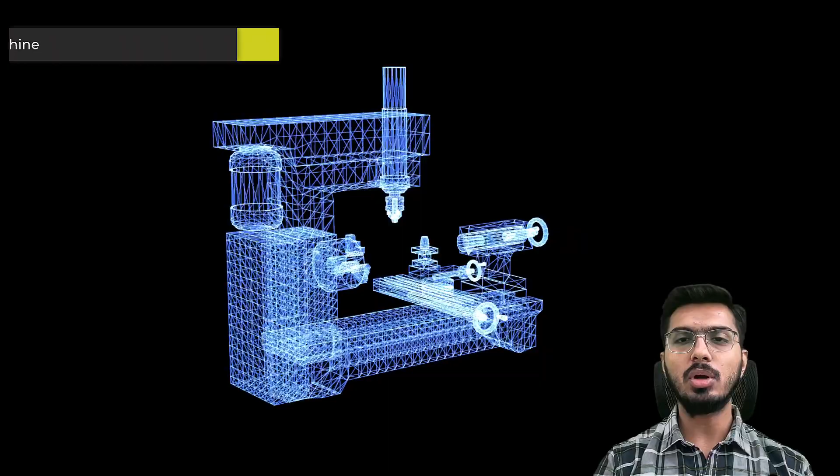In this video, we will dive deep into the intricate details of a lathe machine. We will explore the operation of its various parts.

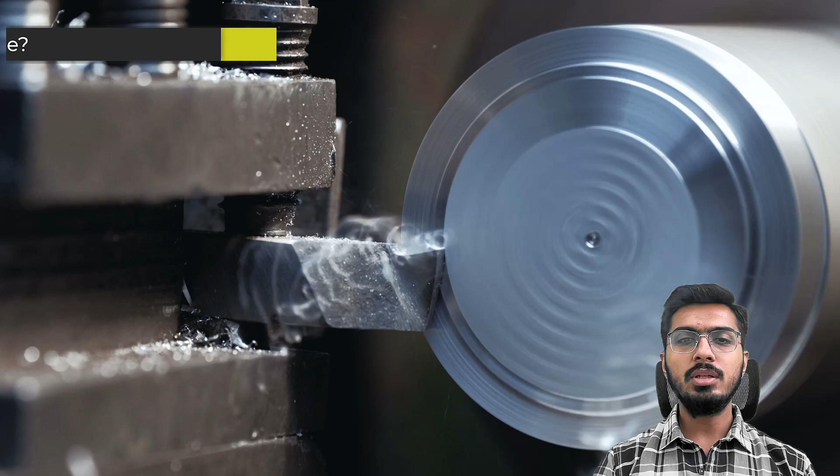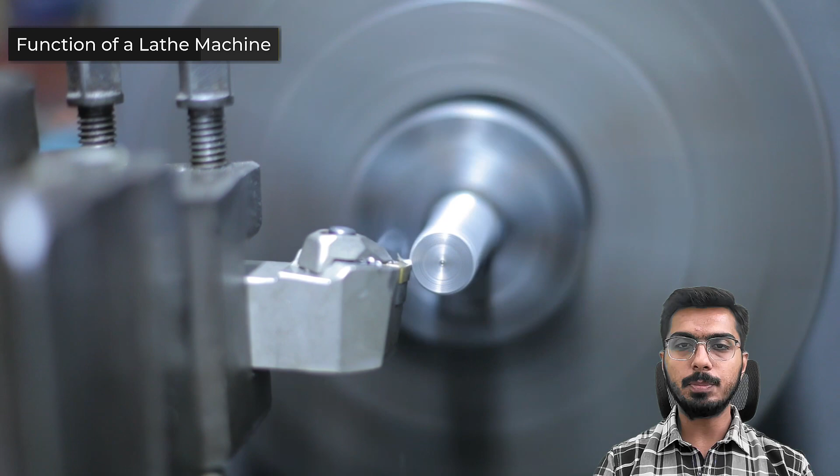Before we dive in, let's first understand what a lathe machine actually is. A lathe machine is a versatile machine tool which is used to shape and size workpieces by removing metal. Its primary function is to remove the metal in the form of chips from a workpiece. This is achieved by securely mounting the workpiece on a machine spindle and rotating it at the desired speed. The cutting tool is then fed against the workpiece longitudinally or crosswise to shape it according to the specifications.

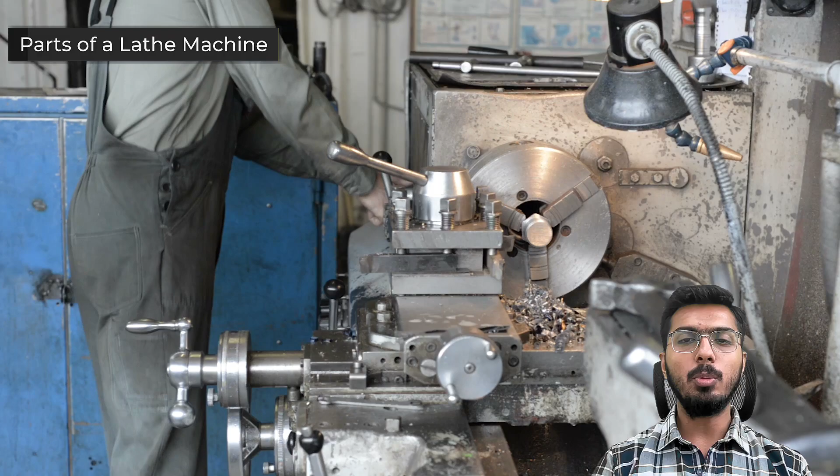Now let's understand the construction details and the operation of different parts that come together to form a lathe machine.

First and foremost, we have the stands or the legs. The legs are usually made up of cast iron. They are made to bear the entire load of the lathe machine. Their high shock absorbance and wear resistance capacity help absorb vibrations during work and transfer them to the ground.

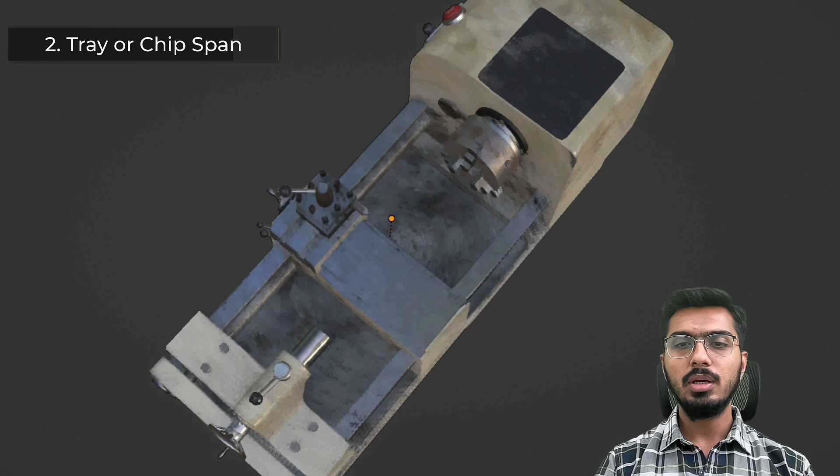Above the legs we have a tray, also known as a chip pan. This is positioned below the bed and above the legs. Its main function is to collect and carry the hot chips generated during the machining process.

Speaking of the bed, it is the foundation on which all the lathe parts are mounted. The bed is a massive and rigid single-piece casting. It is carefully chosen to support the active components of the lathe machine. Depending upon the specifications and requirements, the bed is typically made of semi-steel or chilled cast iron due to their high compressive strength, shock absorbent properties and excellent lubrication qualities.

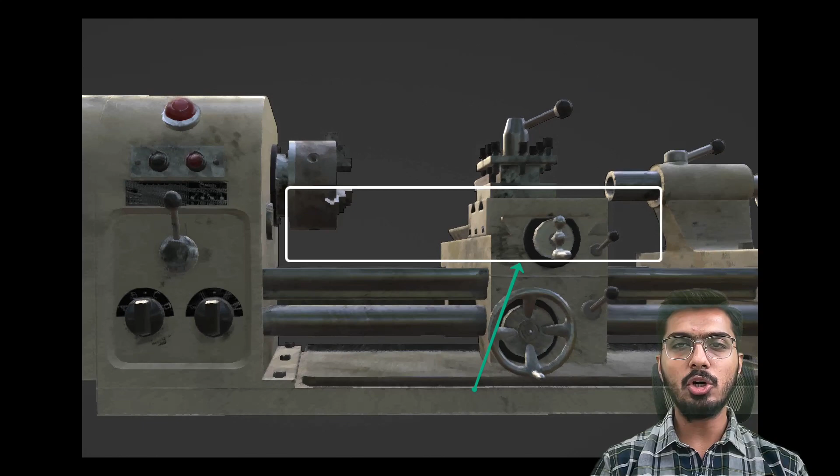In the case of larger lathes, 2 or 3 pieces of bed may be casted and bolted together, while small general purpose lathes usually have a single piece cast bed. The bed features guideways that facilitate the movement of tailstock and carriage. These guideways ensure smooth and precise motion along the bed's length.

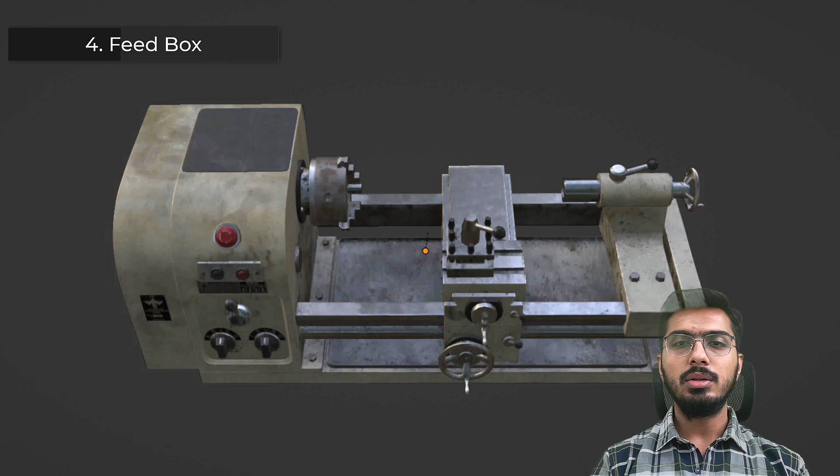Now moving on, we come to the feed box. This is connected to the lead screw and feed rod. The lead screw, an externally threaded shaft or rod, converts the rotational motion into linear motion. This is primarily used for thread cutting operations in the lathe machine. The feed rod, on the other hand, is a cylindrical rod without external threads. It serves to move the carriage from left to right and vice versa.

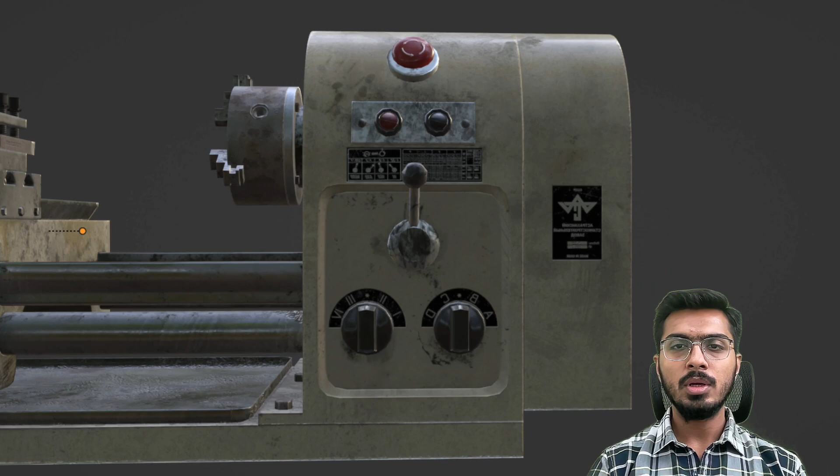Now let's shift our attention to the headstock and tailstock. The headstock is located at the left end of the lathe bed. It houses the driving mechanism, which includes the electrical mechanism of the lathe machine. It transmits power from the spindle to the feed rod, lead screw and the thread cutting mechanism.

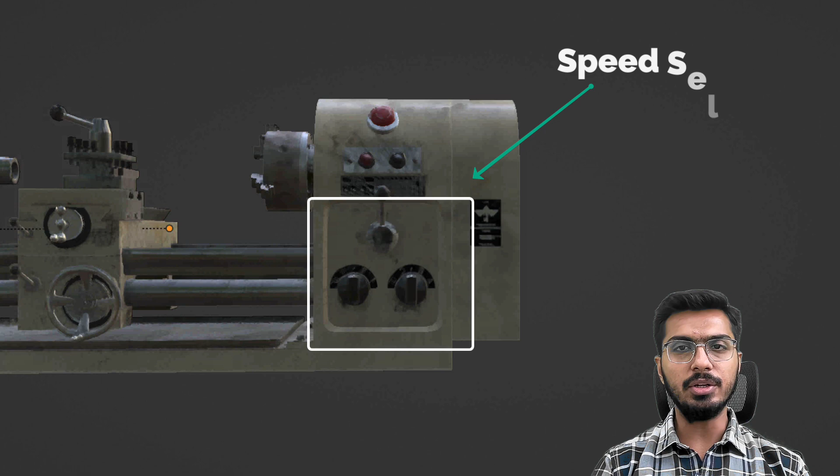The headstock features speed selectors for controlling gear speed, and a driving clutch lever engages or disengages the spindle from the gear mechanism. This driving clutch allows us to control the motion of the lathe, engaging or disengaging the spindle with the gears as needed.

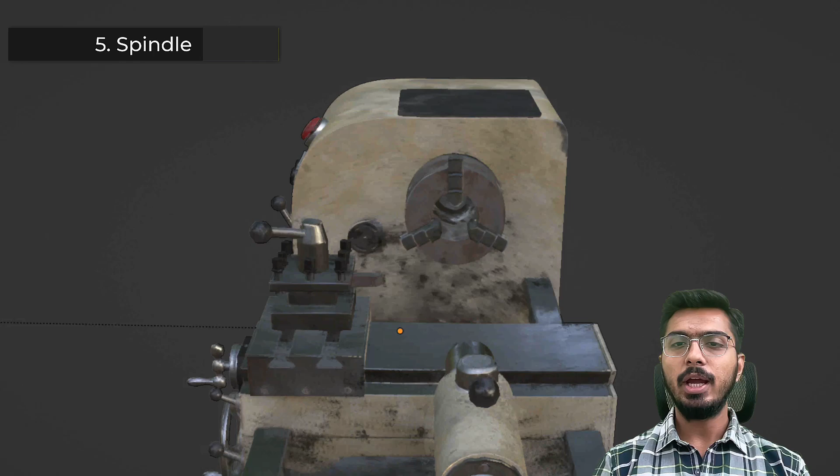The spindle, which is connected to the headstock, plays a crucial role. It possesses a live center to which the workpiece can be attached. The spindle is hollow inside, which allows long bars of workpieces to be handled.

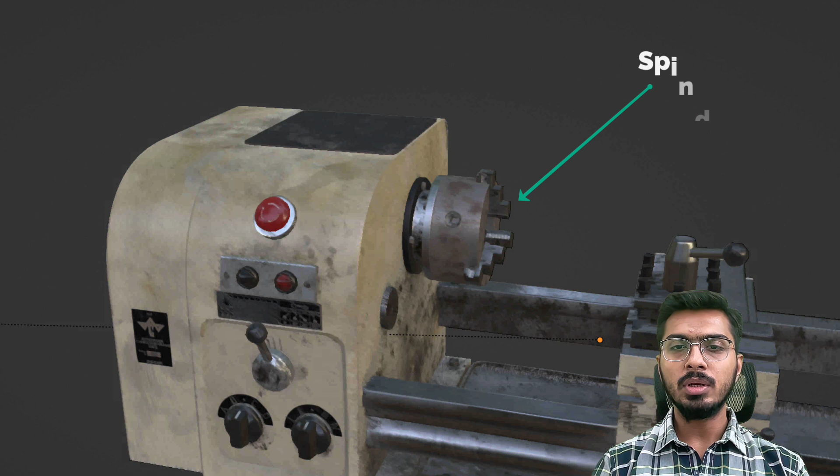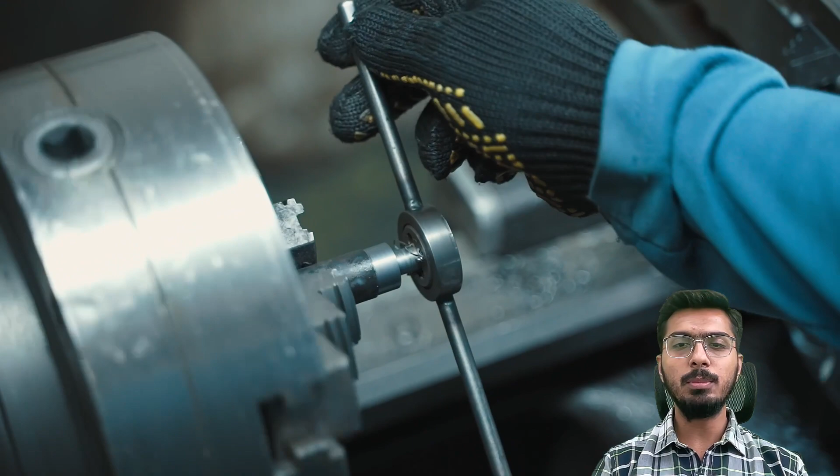The chuck, with internal threads, fits onto the external thread of the spindle, forming an assembly. The chuck securely holds the workpiece during machining operations, and depending on the requirements, we use either a 3-jaw chuck or 4-jaw chuck.

The 3-jaw chuck, also known as a universal chuck, is ideal for holding cylindrical jobs, while the 4-jaw chuck, also called an independent chuck, can hold square jobs in addition to cylindrical ones.

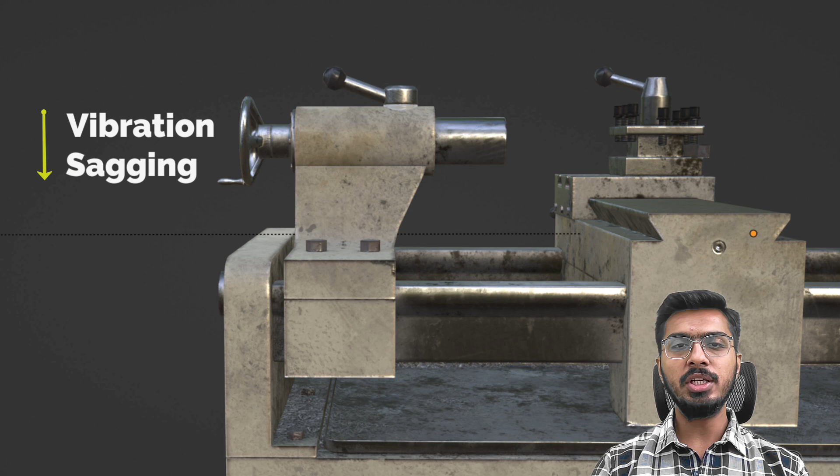On the right side of the lathe bed, we have the tailstock. This is made up of cast iron. The tailstock moves along the bed's guideways and can be adjusted forward, backward, towards or away from the chuck. Its primary purpose is to support the long end of the job, reducing vibration and sagging during machining operations. The tailstock holds the tool for various operations like drilling, reaming, tapping, and can also create a small amount of taper for a long job by offsetting the tailstock.

One end of the tailstock is known as the dead center, which provides support without motion. The other end, called the live center, rotates with the job. Both the live and dead centers have a 60-degree conical point to fit the center holes in a circular job. To ensure stability, the tailstock assembly includes a ram clamp and a hand wheel. The hand wheel enables us to move the dead center back and forth, while the ram clamp locks the dead center in place, which prevents movement.

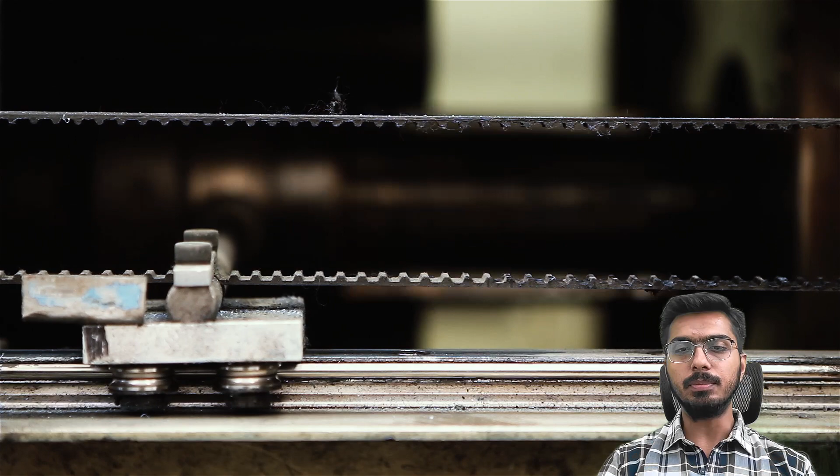On the left side of the headstock, we find the main driving pulley and gear mechanism. This system, connected to the gearbox inside the headstock, enables power transmission. The driving pulley, which is connected to the motor through a belt, ensures the spindle starts rotating.

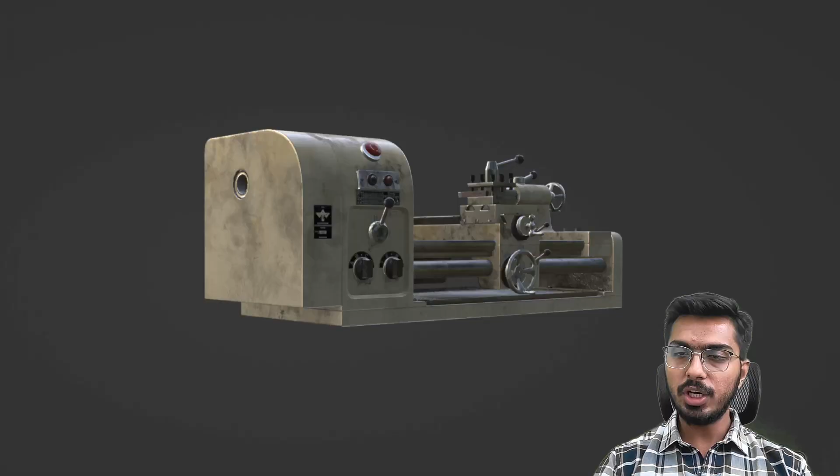Now let's explore the carriage. This is also a vital component of the lathe machine. It provides a rigid support system for the tool, transferring power from the feed rod to the cutting tool through an apron mechanism. The carriage simplifies thread cutting operations using the lead screw and half nut mechanism. The carriage is composed of 5 parts: the saddle, cross slide, compound rest, tool post and an apron.

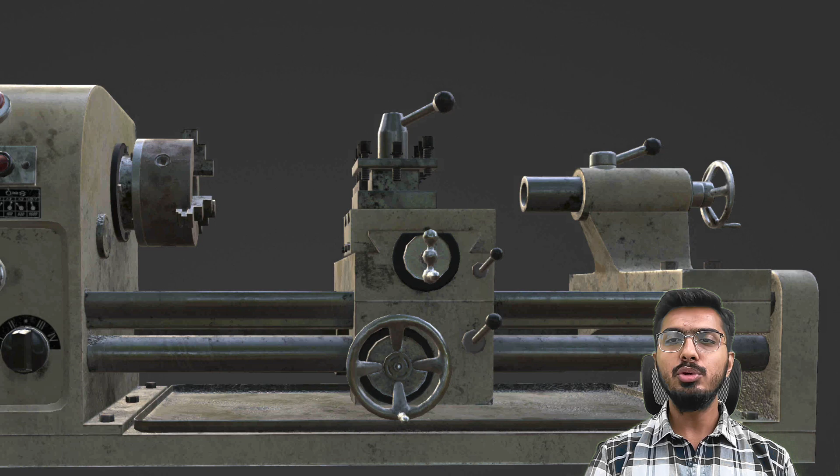The saddle, usually made of H-shaped casting, mounts on the lathe bed and supports the cross slide. The cross slide is actuated by a screw which moves the saddle perpendicular to the bed, allowing for cross movement.

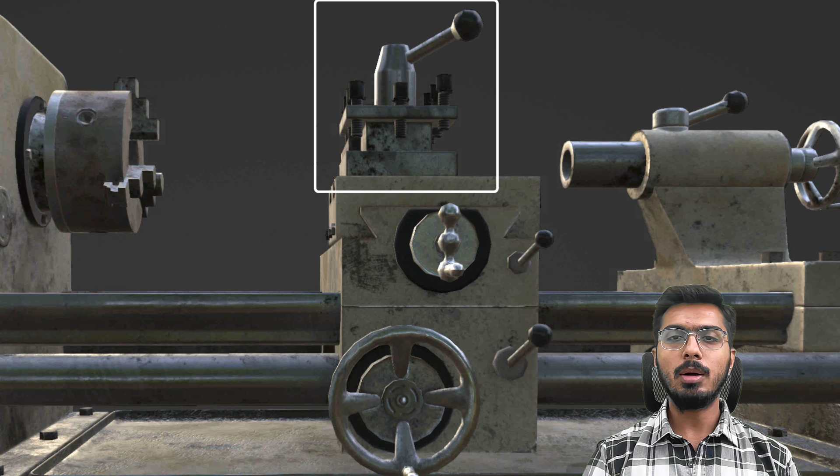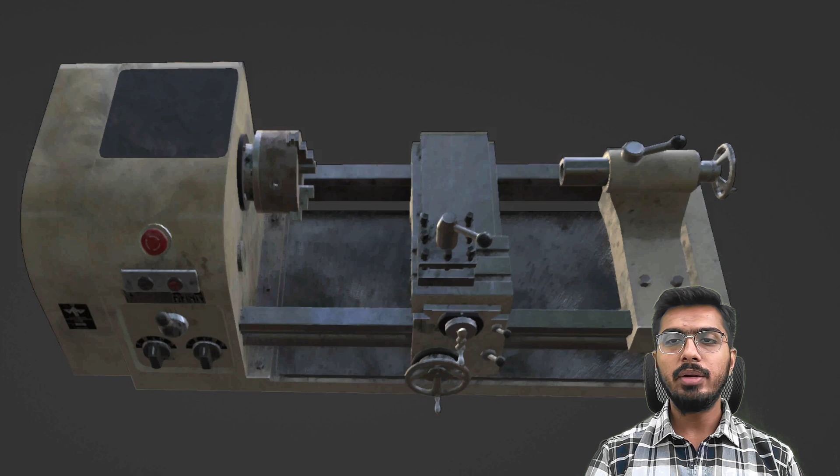Above the cross slide, the compound rest can be swiveled to any desired position in the horizontal plane. This supports the tool post and cutting tool, which facilitates turning angles and boring short tapers. Mounted on the compound rest, the tool post plays a crucial role in holding various cutting tools or tool holders. It fits into a T-slot in the compound rest and holds the tool securely in place using the tool post screw.

The apron, which covers the mechanism inside the carriage, transmits motion from the feed rod to the carriage. It contains gears, clutches and a half nut that engages with the lead screw for cutting threads. Acting as a housing for all these mechanisms, the apron ensures smooth motion.

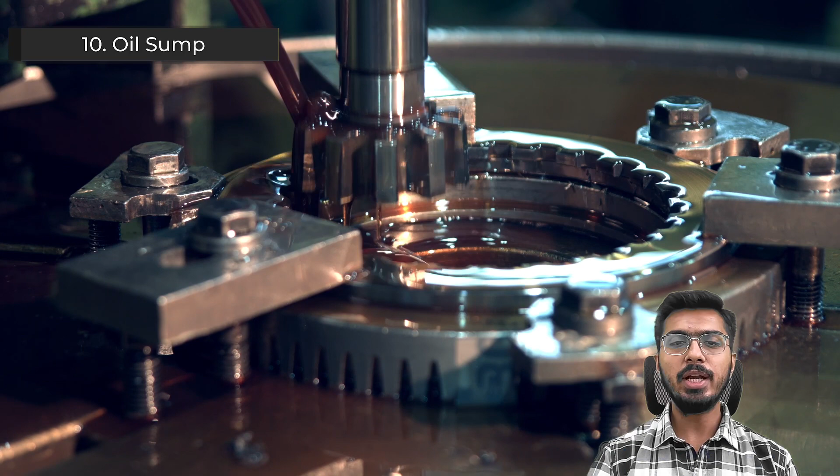Now below the lathe bed, we find an oil sump. This serves as a reservoir for machine oil, collecting oil from various parts, especially the shaft. The oil sump keeps the lathe machine lubricated for optimal performance.

Also, there is a space available on the leg of the lathe machine, which can be utilized for storing gears, chucks, tools and even as housing for the motor mechanism in some lathe machines.

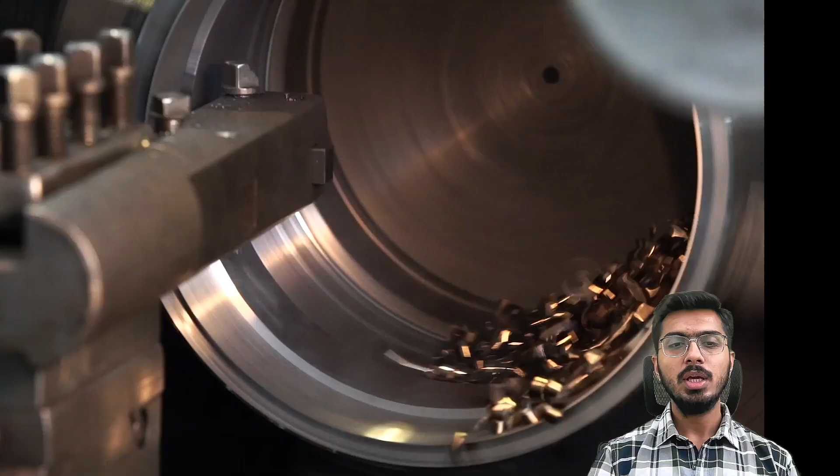And there you have it. We have covered the construction details and provided a detailed overview of the operation of different parts of a lathe machine.